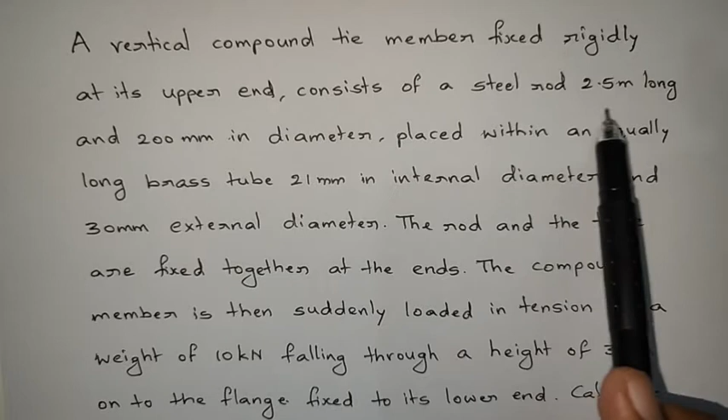Consists of a steel rod 2.5 meters long and 200 mm in diameter.

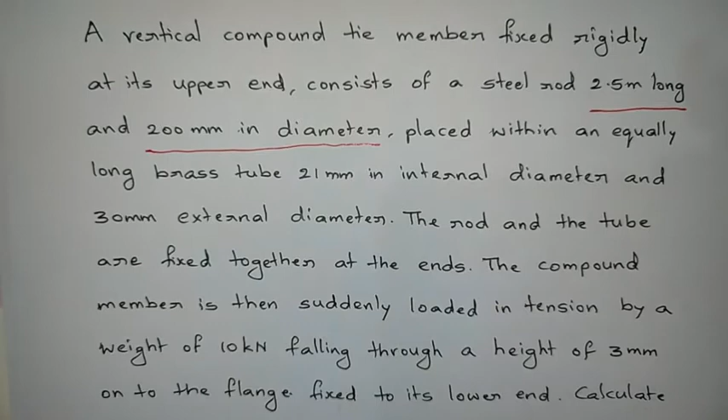And it is placed within an equally long brass tube, 21 mm internal diameter and 30 mm external diameter.

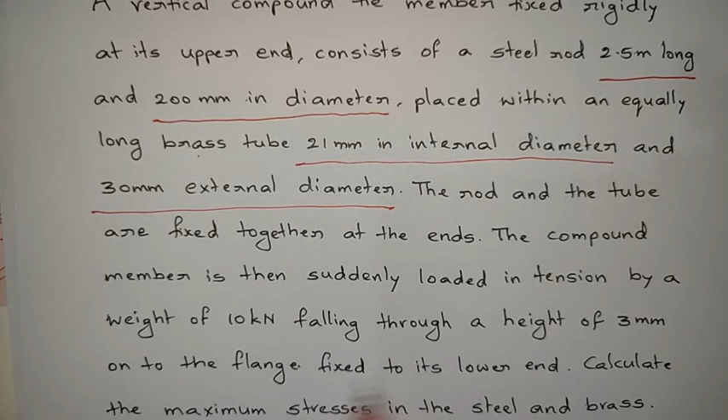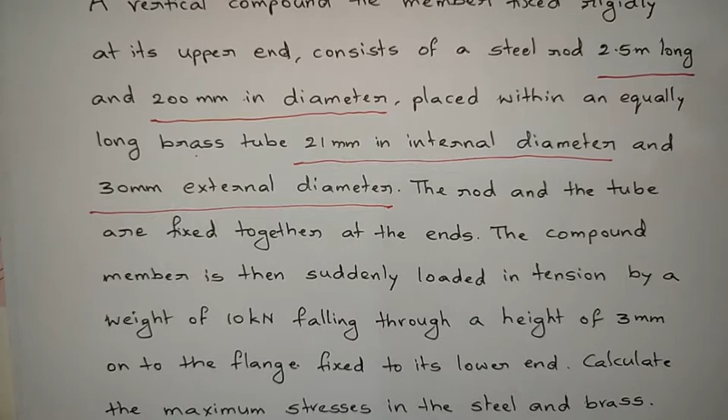Then calculate the maximum stress induced in the steel and brass.

Assume ES value and EB value, right? So it is just a simple problem.

First draw the diagram for this model. So here I am drawing the diagram. Now I am taking a rod that is made up of steel.

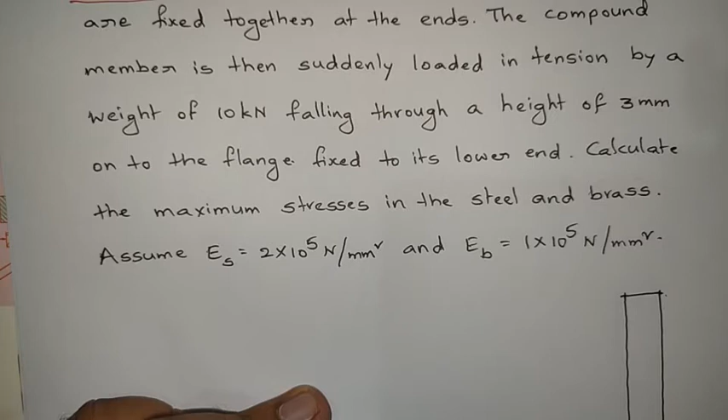So it is 200 mm, sorry, it is 20 mm, not 200, 20 mm in diameter. Okay, so now the diameter of the steel is 20 mm.

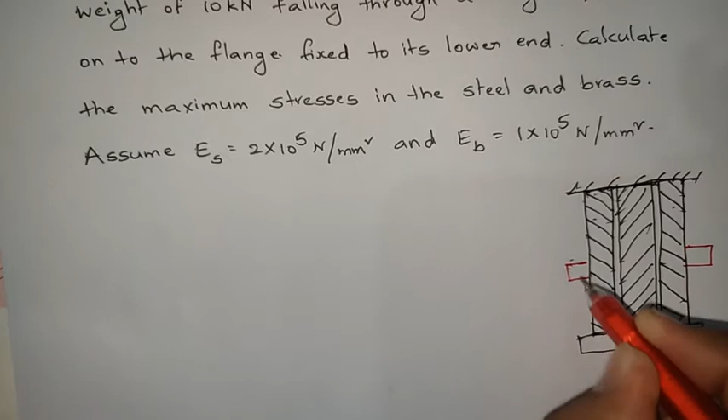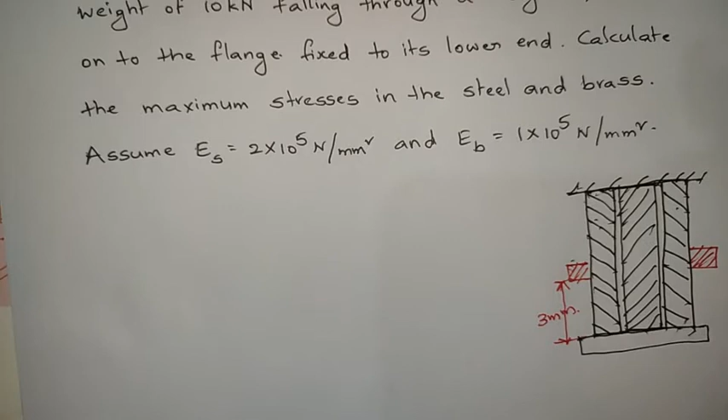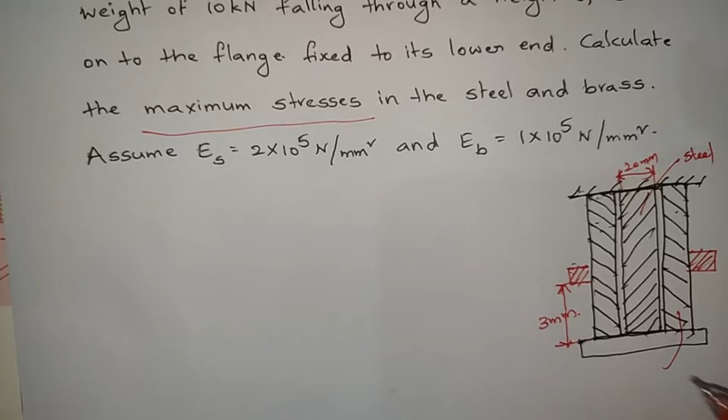Then he is asking us to find the maximum stress value. Okay, so now this diameter, made up of steel, is 20 mm. So this material is steel and this material is brass.

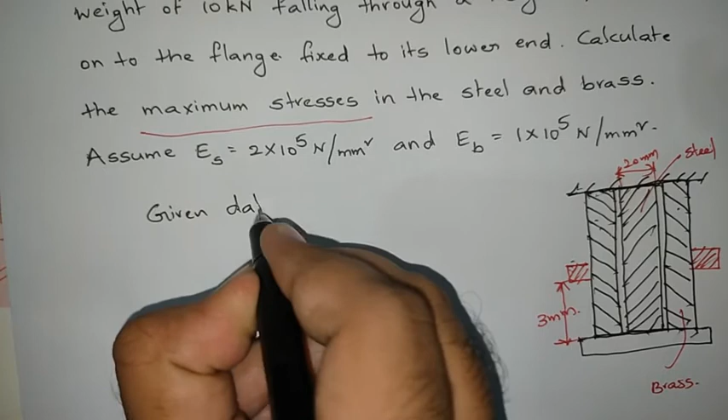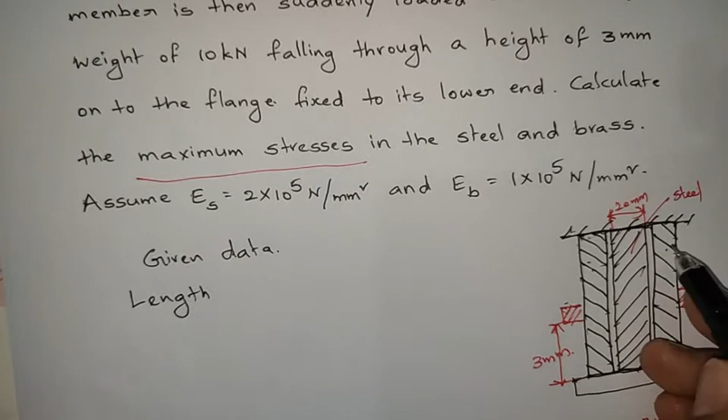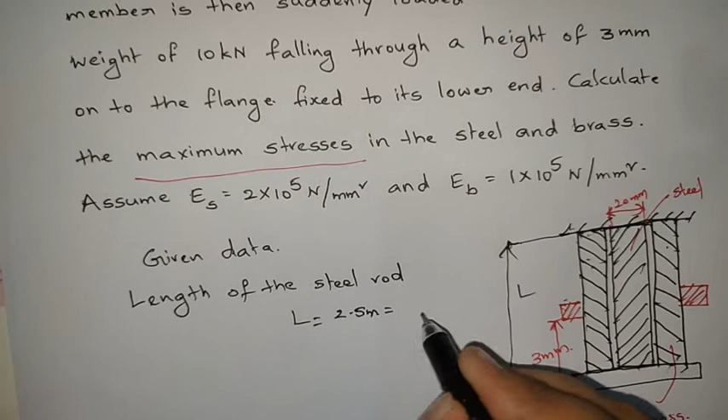Okay, so first write the given data. So the steel length is given, so that is length of the compound rod, because steel length and brass length are both the same. So this is the length, and for both materials it is the same. That's why I am writing it as a common letter L. So length of the steel rod, denoted by L, equals 2.5 meters, so that equals 2500

mm. Next, diameter of steel rod, denoted by D for steel rod, equals 20 mm. So then find the area. Area equals pi by 4 into ds square, so that equals pi by 4 into 20 square. So you will get 100 pi mm square as the area.

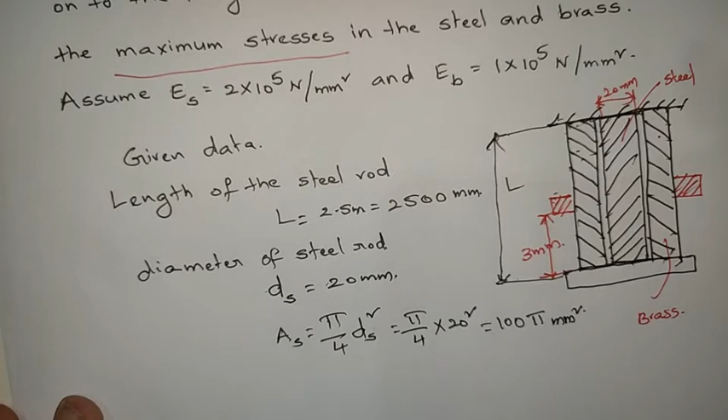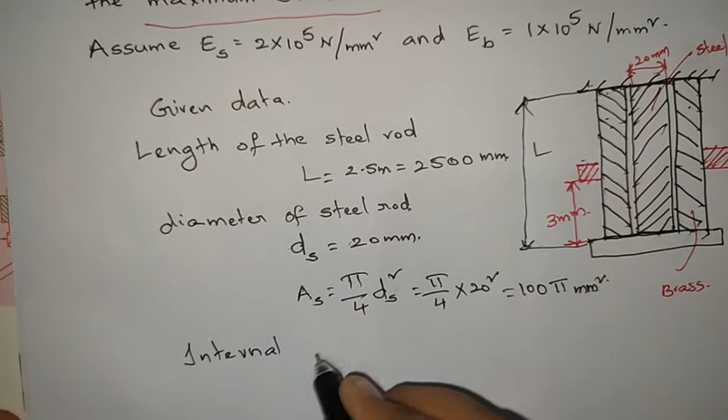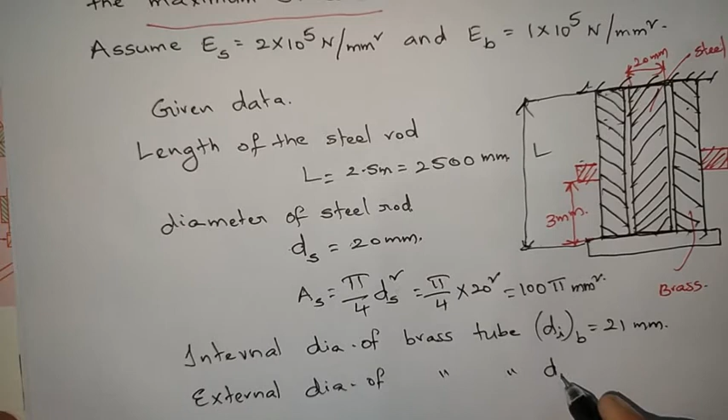And next, about brass tube is given. So what is internal diameter of brass tube? Internal diameter of brass tube, represented by DI of brass tube, equals 21 mm. Next, external diameter of brass tube, that is DO, outer diameter of brass tube, is 30 mm.

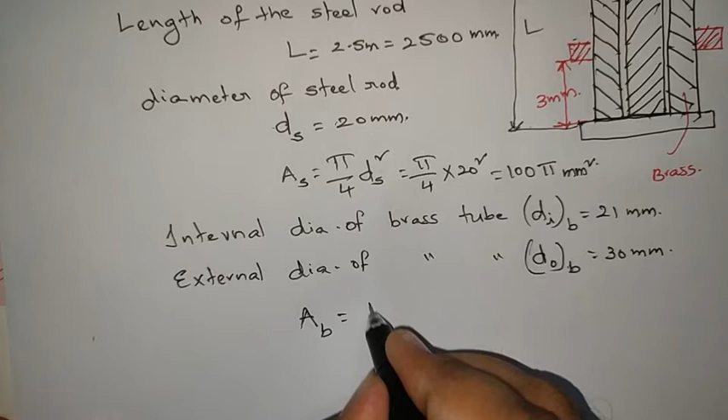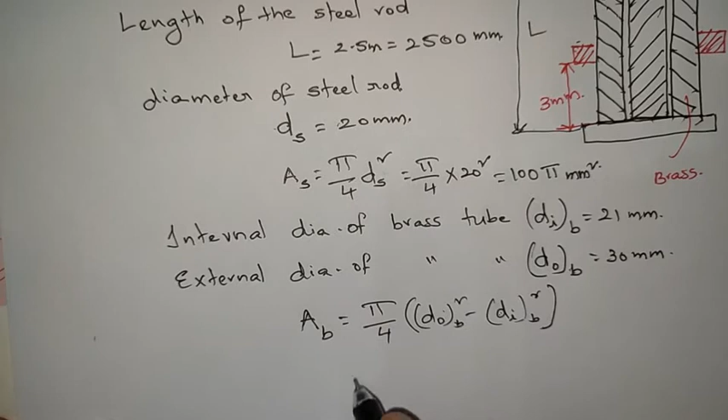Then calculate the area of brass tube. Area of brass tube equals pi by 4 into DO of B square minus DI of B square. So substitute the values: pi by 4 into 30 square minus 21 square. So that equals, you will get it as 114.75 pi mm square.

Next, length of the brass tube is also the same, so that is L.

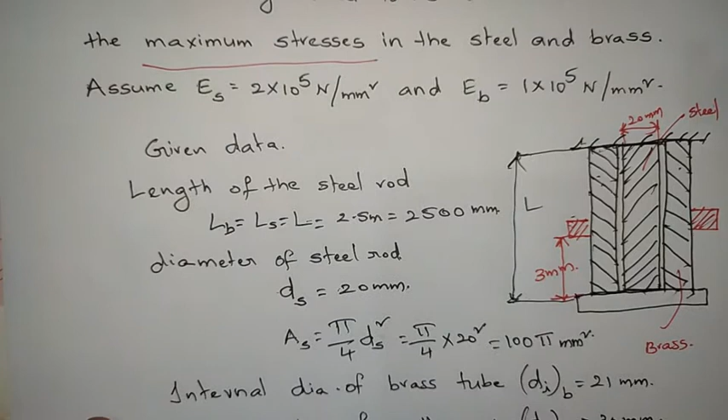That equals LS and that equals LB. Right, so now all the data we have written and a load value is given. How much amount of load is there? Load P equals 10 kilonewtons. So now he is asking us to find the stress value, and also height is given, height H equals 3 mm.

So load 10 kilonewtons in newtons is 10 into 10 cube newtons. Okay, so now let us find the strain energy first of all.

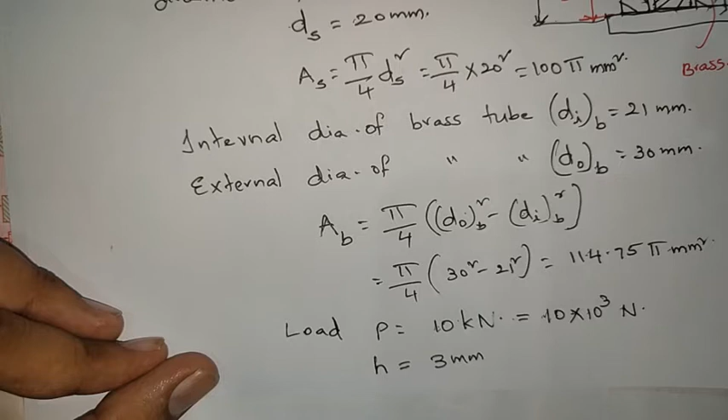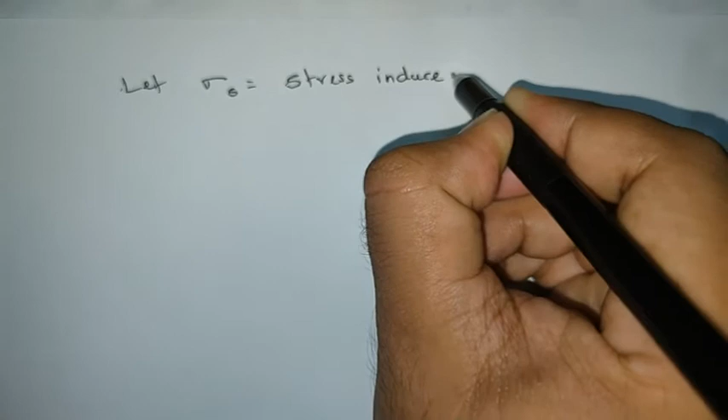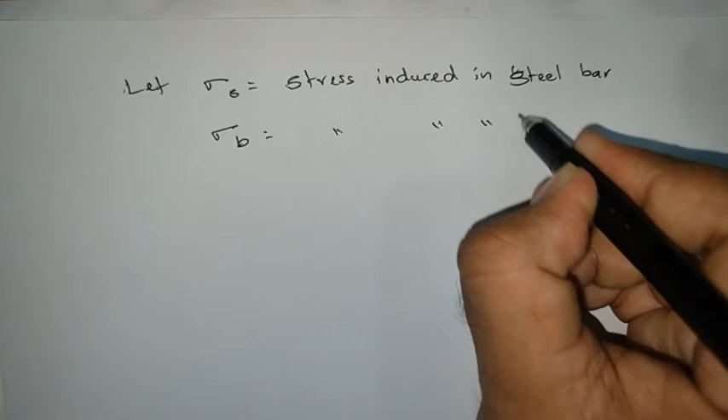So let sigma S be the stress induced in the steel bar, and sigma B be the stress induced in the brass bar. Now we need to find the maximum stress, or the stress induced in the compound bar.

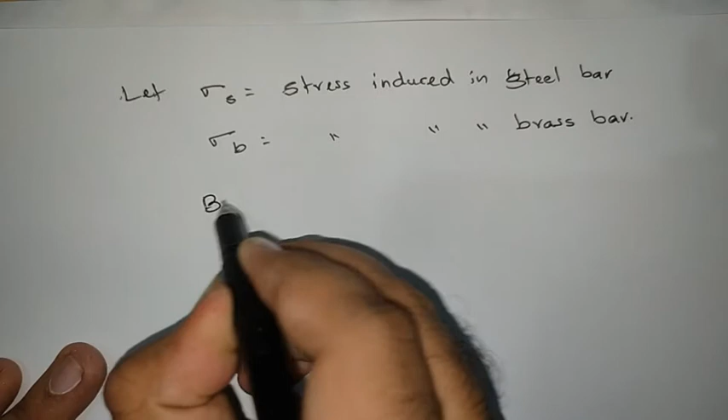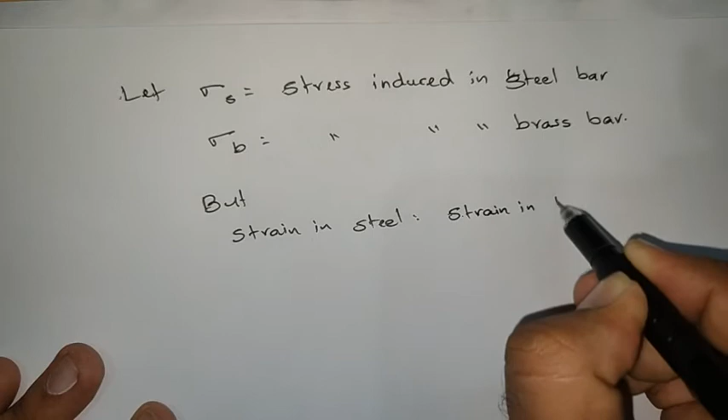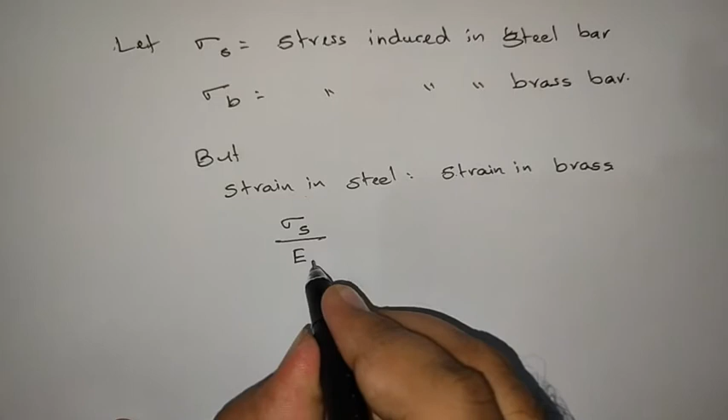But strain in steel equals strain in brass. So what is strain in steel? Strain means stress by E. So for steel, stress sigma S by ES equals for brass sigma B by EB. So this is strain.

We know that Young's modulus equals stress by strain, so strain equals stress by E. That is the same thing I applied.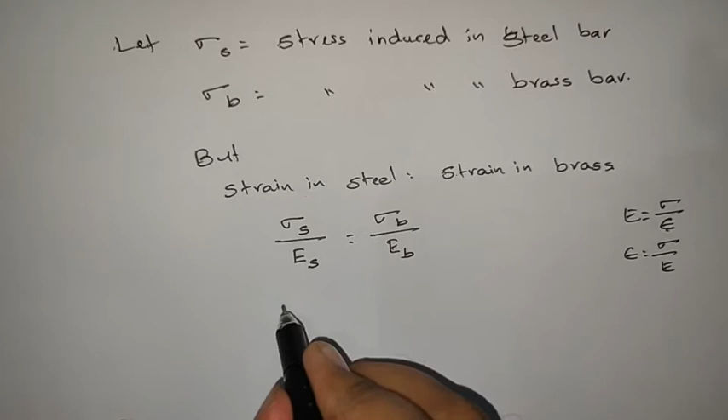Now substitute the values. Sigma S by ES, which is 2 into 10 power 5, equals sigma B by EB, which is 1 into 10 power 5. Then sigma S equals, 10 power 5 cancels, 2 into sigma B.

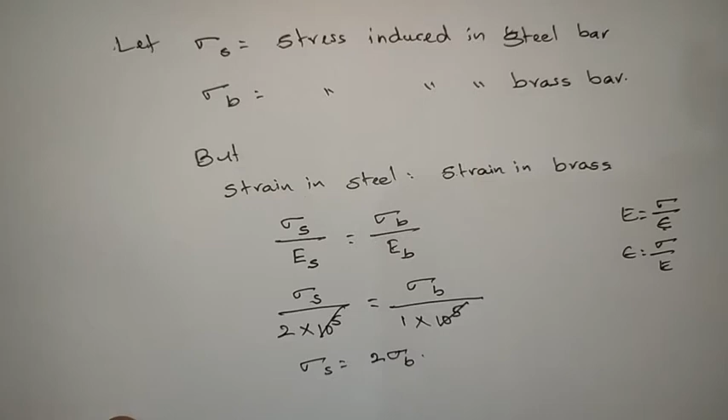Now what is the volume of the rod? Volume of the rod equals, first, volume of steel rod, represented by Vs. That equals area into length. What is the area of steel? 100 pi into length of steel rod, which is 2500 mm. So the volume of the steel rod equals 250,000 pi mm cube.

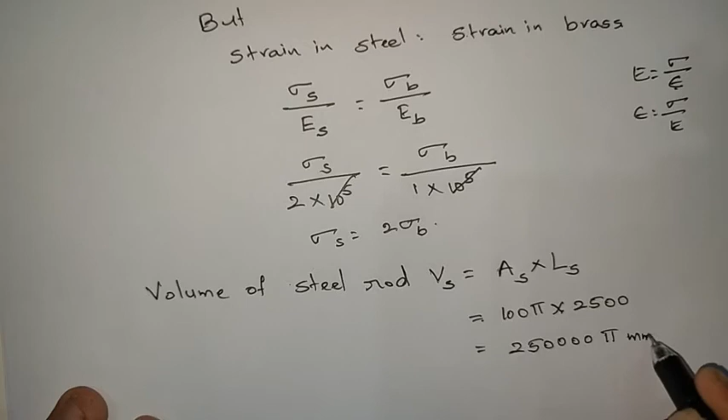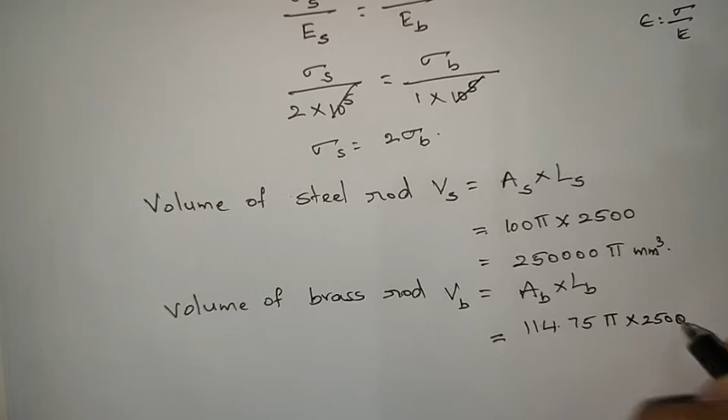Next, let us calculate the volume of the brass rod. VB equals area of brass rod into length of brass rod. Area of brass rod is 114.75 pi into length, which is 2500; both lengths are the same. So it equals 286875 pi mm cube. Now I got the volumes.

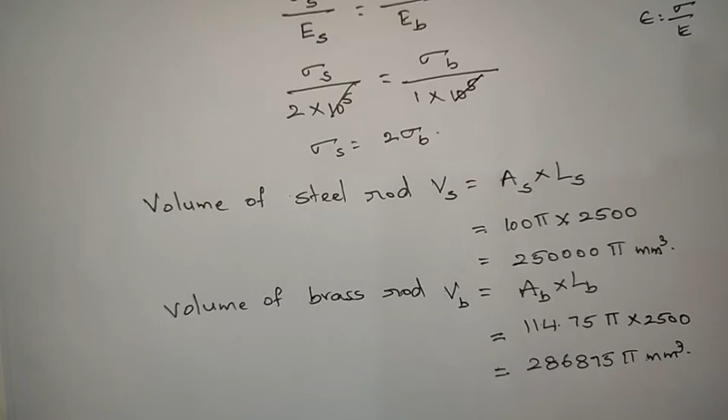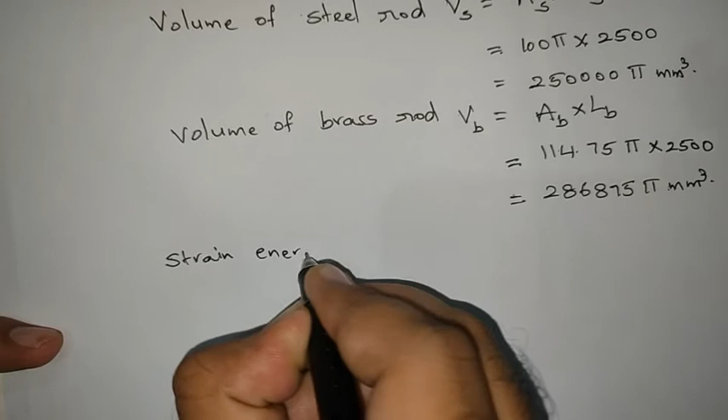Now let us calculate the strain energy. Strain energy stored in the steel rod, US, equals sigma S square by 2E into Vs. Now substitute the values.

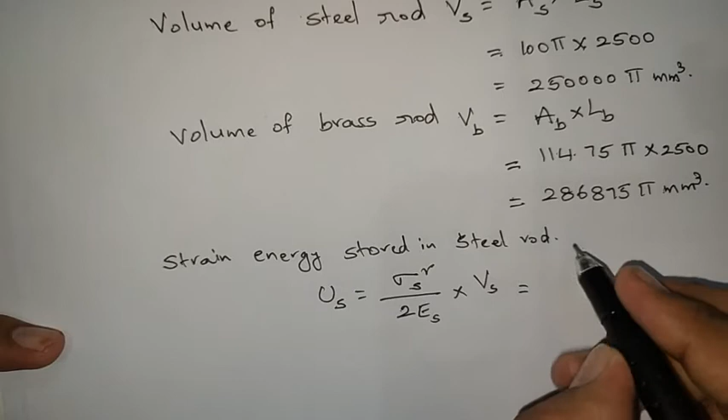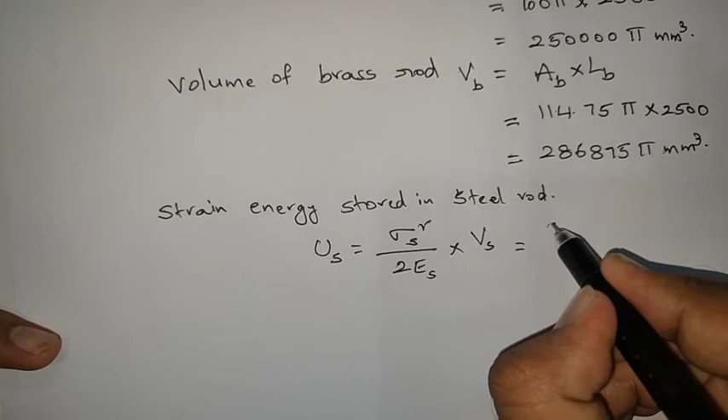Sigma S square: sigma S means 2 into sigma B. Substitute that: 2 into sigma B whole square, by 2 into ES value which is 2 into 10 power 5, into Vs value we got, 250,000. Then the strain energy stored in the steel bar equals 7.854 sigma B square. If you solve this expression, you will get this value.

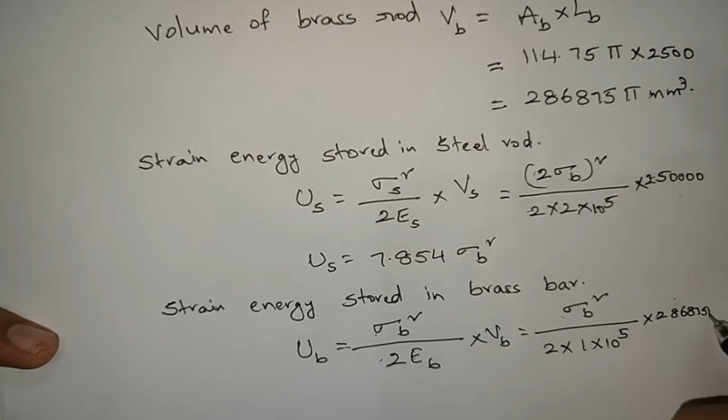Next calculate the strain energy stored in the brass bar. That is UB equals sigma B square by 2EB into VB. Substitute sigma B square by 2 into EB value which is 1 into 10 power 5, into VB value which is 286875 pi. If you substitute, you will get UB in terms of sigma B as 4.506 sigma B square.

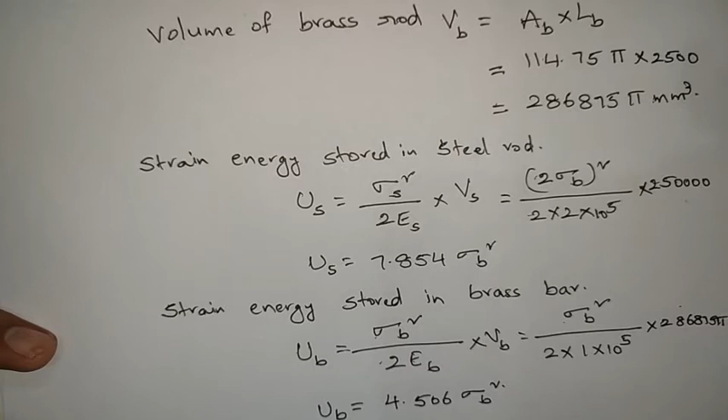Okay, now calculate total strain energy. Because the compound rod is formed with both steel and brass, we need to add these two together.

So total strain energy U equals US plus UB, that equals 7.854 sigma B square plus 4.506 sigma B square. U equals 12.36 sigma B square. So now I got the strain energy.

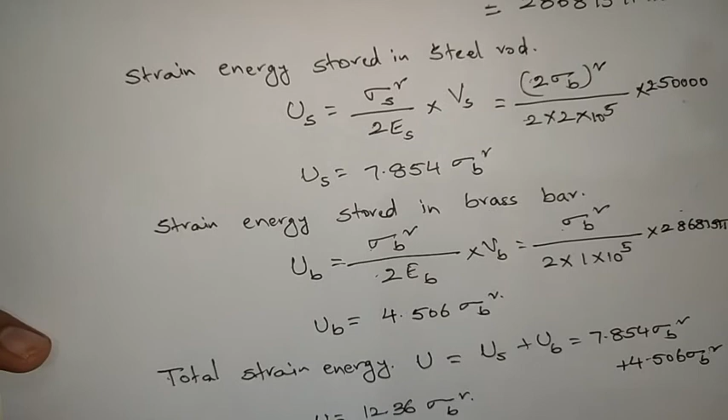Next, calculate the work done. So what is the work done value? Work done by the load.

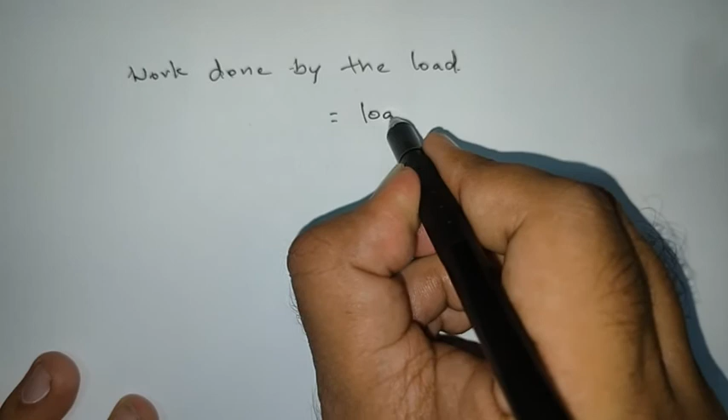So that equals work done, meaning load into distance traveled by load. Load is P, into distance traveled by load is H plus delta L, right?

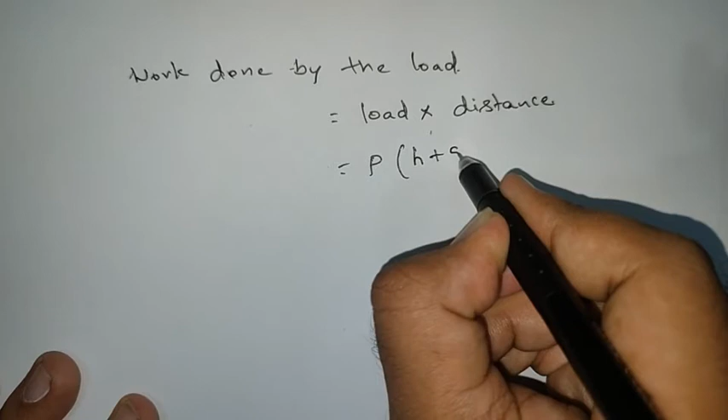So load is 10 kilonewtons, that is 10 into 10 cube into height. H value given is 3mm, so 3 plus delta L. I don't know delta L. If I know delta L, then I can find the work done value. So how to find delta L?

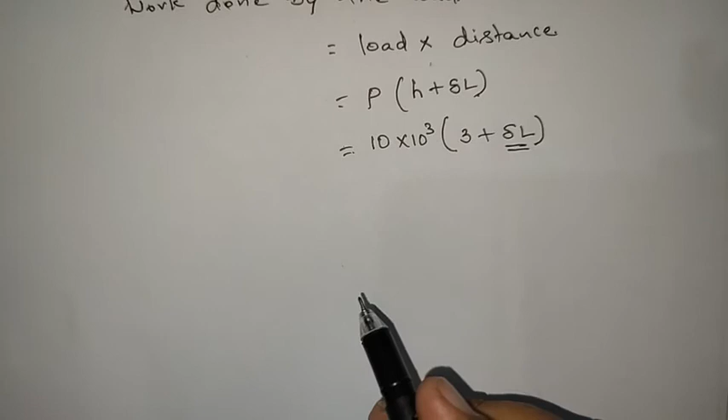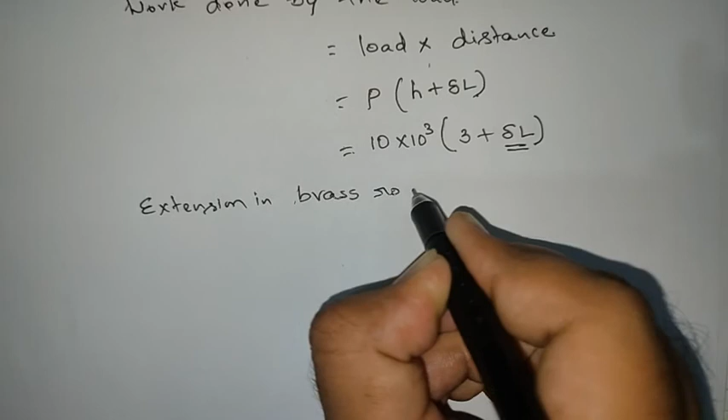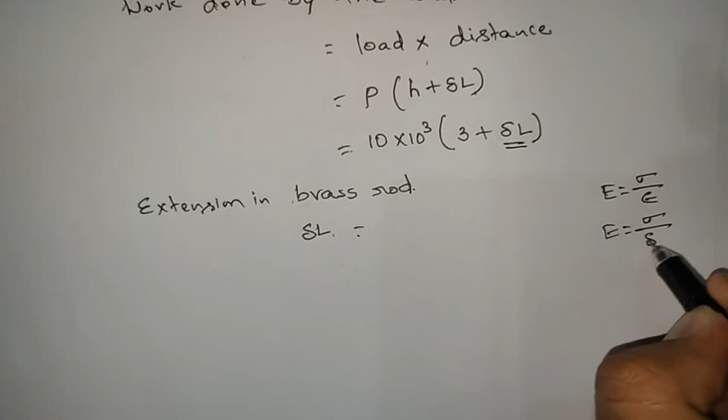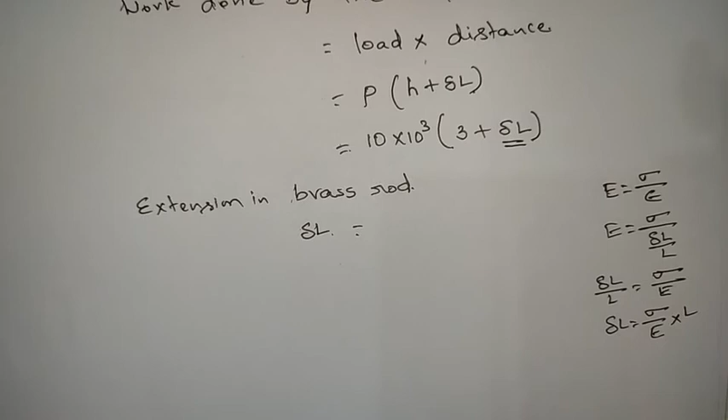So delta L of brass rod equals, we know that E equals stress by strain. So E equals stress by strain means delta L by L. So delta L by L equals sigma by E, and delta L equals sigma by E into L. So now substitute sigma by E into L for brass rod.

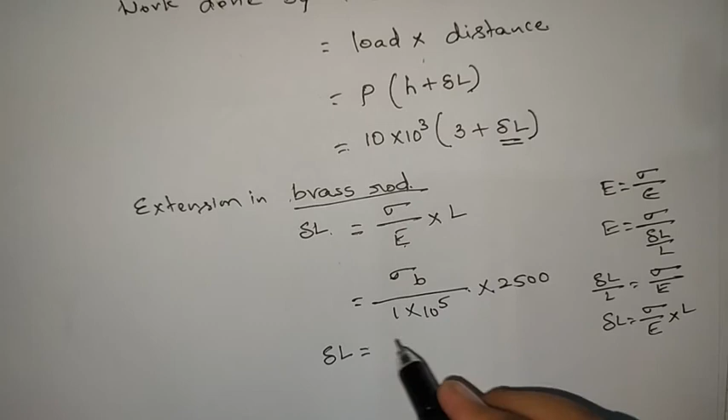Substitute the brass rod values. Sigma B value is how much? We don't know, we need to calculate that one by E. E of B is 1 into 10 power 5, into length is, what is the length value given? 2500mm. So that equals delta L value will be 0.025 sigma B.

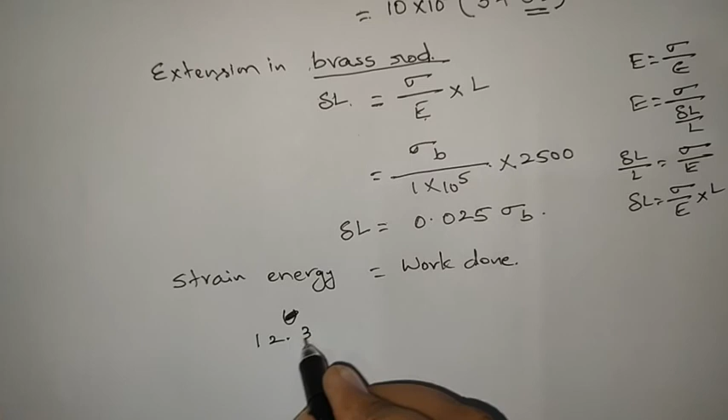But what we know is strain energy equals work done. Strain energy equals work done. So strain energy, what is it, the value given, 12.36 sigma B square. We got that earlier. So the total strain energy U equals 12.36 sigma B square.

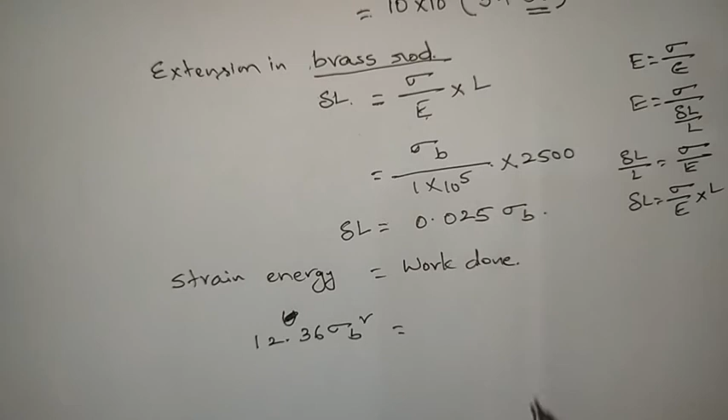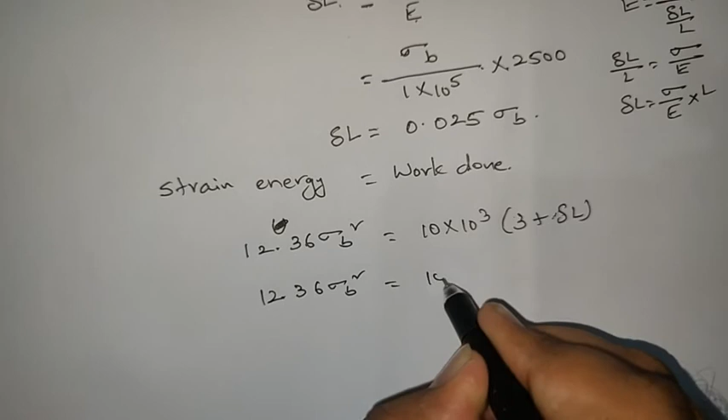I wrote the same thing, equals work done. Work done is how much, 10 into 10 cube into 3 plus delta L. So that equals 12.36 into sigma B square, that equals 10 into 10 cube into 3 plus delta L value, 0.025 sigma B. Then calculate the value of sigma B.

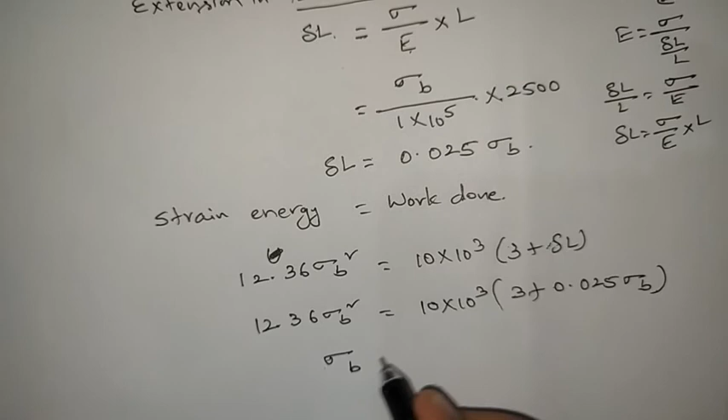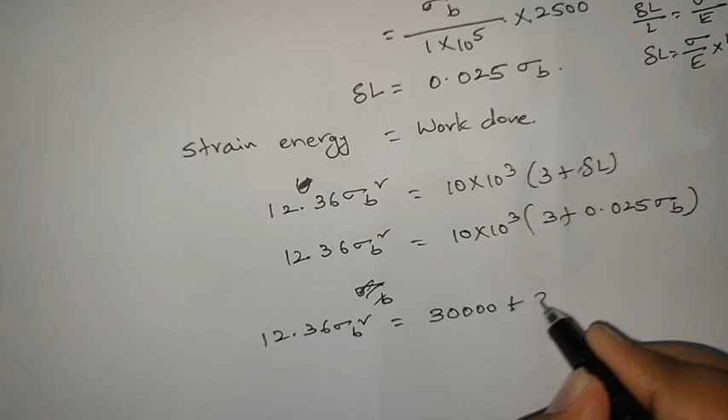So sigma B, if you do that, you will get 12.36 sigma B square equals 30 into 10 cube means 30,000 plus 10,000 into 0.025. So that equals 250 into sigma B. Then 12.36 sigma B square minus 250 sigma B minus 30,000 equals 0.

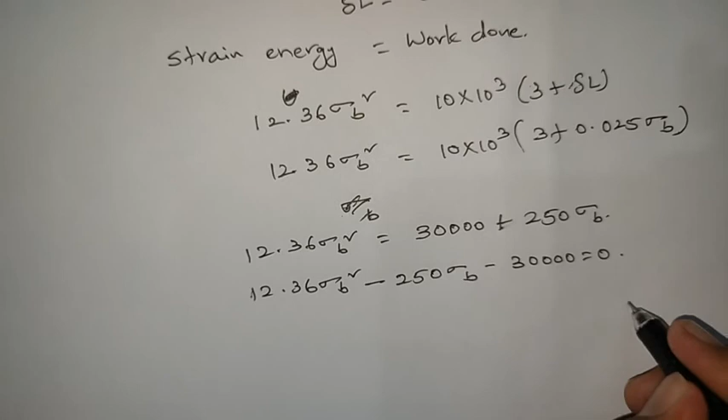So now it is a quadratic equation. How to find the value of the quadratic equation? Sigma B equals the formula minus B plus or minus square root of B square minus 4AC by 2A. So now use that formula.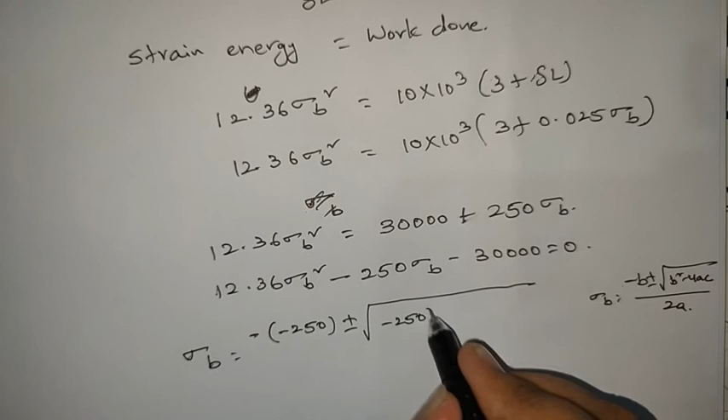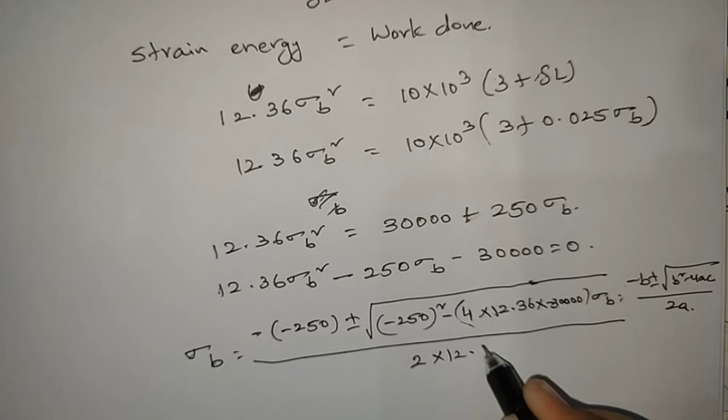Therefore sigma B equals minus B, minus into minus 250 plus or minus square root of B square minus 250 whole square minus 4 into A value 12.36, C value minus 30,000 by 2A. So 2 into 12.36. So that equals...

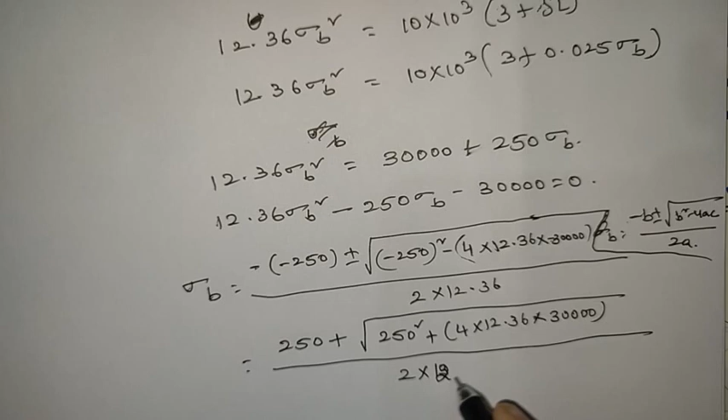250, so take only plus, neglect minus. So plus square root of 250 square minus 4 into 12.36 into, here minus into minus plus 30,000, divided by 2 into 12.36. So if you solve this, you will get sigma B.

So sigma B equals 60.4 Newton per mm square. So if you solve this expression, you will get sigma B, this one.

And next, what is sigma S? Sigma S equals, we already know, 2 into sigma B. So that equals 2 into 60.4, that equals 120.8 Newton per mm square.

So we calculated the stress induced in the brass bar and the stress induced in the steel bar. So like this we need to solve the problem. I hope you understand this problem.